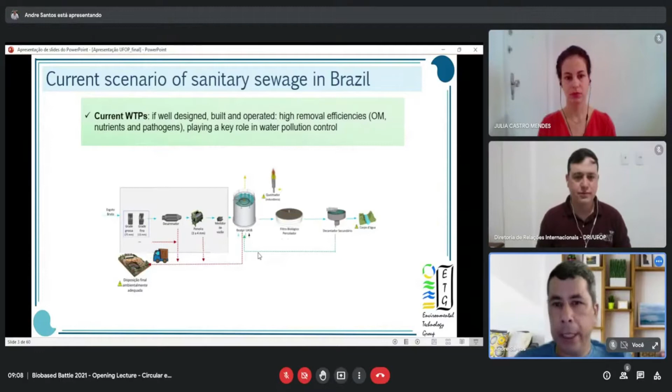Okay, so we have the current scenario of sanitary sewage in Brazil: our current wastewater treatment plants are designed based on environmental legislation. And if well designed, built and operated, we do have high removal efficiencies of organic matter, nutrients, and pathogens, playing a key role in water pollution control.

So there is the lack of perceived financial return with the wastewater treatment plant. We have to pay for the final disposal of the sludge, and sometimes that has a very high cost due to the volume that needs to be transported, and also the many kilometers from the source to the final disposal. The biogas is wasted, sometimes burned, when we apply some anaerobic digestion process to treat the wastewater.

And the treated liquid is disposed in a water course, often adding an unwanted residual of pollutants and contaminants. Unfortunately, in Brazil, we sometimes have the collection and the disposal of raw sewage. And sometimes when we do have a wastewater treatment plant, the efficiency is not very high. Sometimes it is limited to organic matter removal.

And sometimes we are causing environmental problems due to the discharge of nutrients, causing eutrophication, the death of fish, and changing the ecosystem that is based on the water. So in this scenario, the biogas is simply burned. Sometimes it is released to the atmosphere, and we know that methane is more problematic for the greenhouse effect than CO2, more than 25 times.

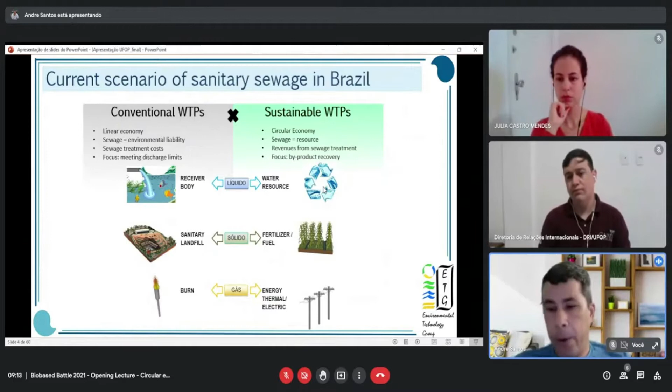And for the gas, and also for the solid, we may use it as a fuel, for instance applying anaerobic digestion or other technological processes, for instance pyrolysis, that can convert this solid into energy. And for the gas phase, instead of burning the methane, we could use it as thermal or electrical energy. So the main goal of this resource recovery is to contribute to the planetary limits.

Here we have many indicators of the planetary limits: ocean acidification, nitrogen cycle use, and many other topics. And here we have the green zone. We can see from this picture that many of these parameters are above the limit, for instance the nitrogen cycle. And phosphorus is very close to the limit. We have a problem with phosphorus because it is not a renewable source, and we don't have a technological way to produce phosphorus.

It's different, for instance, from nitrogen, where with the Haber-Bosch process we can convert the nitrogen in the gas to ammonia. So for phosphorus, we need to think of ways of returning this nutrient to food production. So these planetary limits point out that we need to recover resources from sewage treatment. This is a paper published in Nature in 2009.

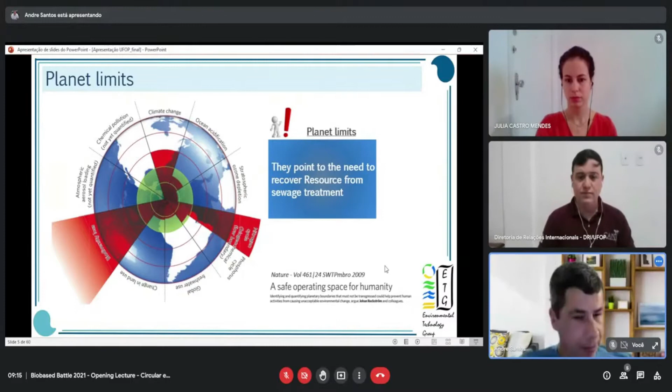And there is a very bad scenario that, for instance, in 100 to 150 years ahead, we have a phosphorus limitation for food production, and we have to accommodate population growth, and we have to give food to this population that is growing every year around the world.

So this kind of resource recovery is also in line with the Sustainable Development Goals, especially in the topics of clean water and sanitation, sustainable cities and communities, climate action, and also affordable and clean energy. So when we think about biogas reuse, we are reaching goal 7 of the SDGs.

So related to the sanitation conditions in Brazil, 43% of the sewage is collected and treated, and once more, this treatment sometimes is only to remove organic matter. Actually, few of the treatment plants in Brazil are designed and operated well to remove, for instance, nitrogen and phosphorus. 18% of the wastewater is collected and discharged untreated in the receiving body.

27% is not collected and treated. And we have around 12% of individual solutions. This is a new report published, here in the Atlas Esgotos, the Wastewater Atlas. It's a Brazilian publication. And we have a very different scenario in the Netherlands, in which the wastewater treatment coverage is almost 100% since 2008.

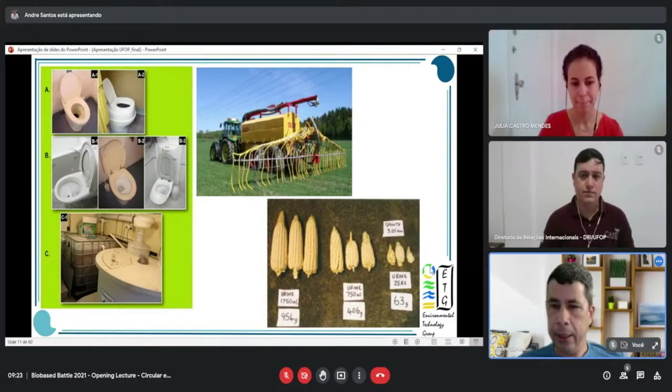This is only a slide showing the use of urine as a biofertilizer. With zero urine, this amount of urine, and this amount of urine, we see the subsequent increase of maize production in this slide. Urine, as I told you, is a very good biofertilizer.

Sometimes, after the treatment, which is simply to store the urine for about 30 to 60 days, the urine can return to the field for food production, replacing commercial fertilizers that sometimes are very expensive. So it's a very good way to produce bionutrients, the biofertilizers, locally and return them to produce food.

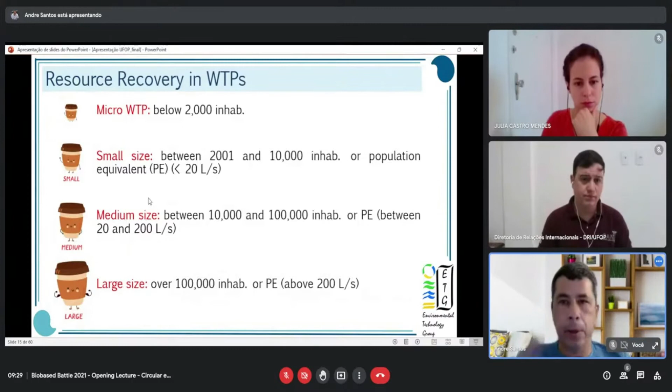For instance, when we think about biogas reuse for electricity generation, sometimes the equivalent population should be higher than this number. When we think about biogas reuse for heating purposes, the number should be around 10,000 to 100,000 inhabitants, and this flow is considered for this kind of purpose. So it's very important to keep track of the amount of people or the organic load involved, which of course results in higher or lower biogas production, for instance, in a treatment plant.

So when we think about sewage composition, 99.9% of the sewage is water, and 0.1% is solids. The organic matter present in the wastewater is a very rich source of chemical energy. So when we think about this organic matter and this energy, for instance in the wastewater produced in Brazil, this organic matter energy could supply around 42 gigawatt hours per month, which is equivalent to supplying this amount of households.

It's a very important way sometimes to decrease emissions and promote the reuse of this energy. When we think about the nutrients present in wastewater, for instance the macronutrients nitrogen, phosphorus and sulfur, the amount present could be equivalent to reusing these nutrients on about 48,000 hectares per year.

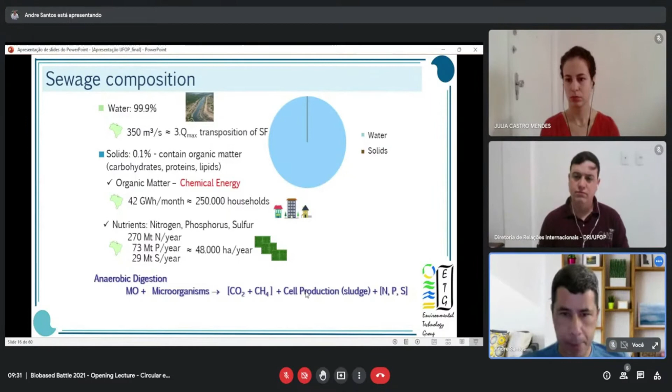When we think about different technological routes for wastewater treatment, we may compare, for instance, the activated sludge process, which is very common in the Netherlands and in Brazil, for instance in São Paulo and Rio, sometimes when we have a very dense population and lack of space. It's a very efficient process, but it consumes a lot of energy.

We have this consumption of 25 kilowatt-hours per inhabitant per year. If we apply, for instance, anaerobic treatment, the UASB reactor followed by a trickling filter, instead of consumption we have a production of about 15. So we decrease the consumption, which decreases operational costs, and sometimes we make the treatment plant self-sustainable in terms of energy, and sometimes we are able to sell what is not used to the electrical company.

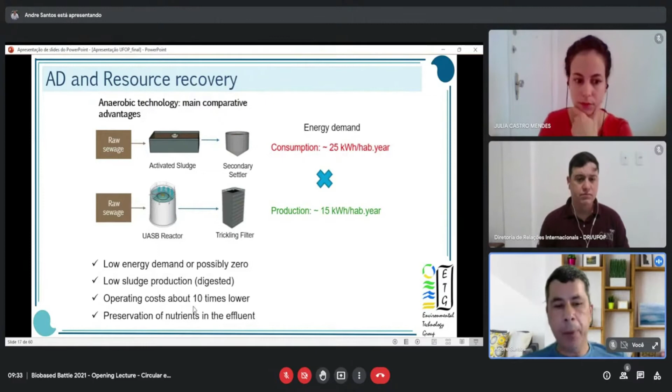If we compare these two technological treatment routes, the anaerobic digestion process has low energy demand, possibly zero. We have lower sludge production compared to the aerobic activated sludge process. We have operation costs about 10 times lower, and we have preservation of nutrients in the effluent, which is very important for reuse of these nutrients.

Over the years from 2015 to about 2020, there was development of the aerobic granular sludge, AGS, system in the Netherlands by Professor Mark van Loosdrecht and Merle de Kreuk from TU Delft, which decreased the aerobic treatment costs and also footprint.

The AGS process has as major advantages a 35% reduction in power consumption, 75% reduction in area demand or footprint, lower investment costs, operation and maintenance costs, and higher removal of simultaneous organic matter, nitrogen and phosphorus in a single reactor that works as a sequencing batch reactor, SBR process. There is also the possibility of resource recovery.

It's patented under the name Nereda, commercialized by the Royal Royal HaskoningDHV Dutch company. Here we have a picture of AGS biomass. If we cross this granule, we may see the different activities of heterotrophic bacteria, nitrogen removal bacteria, nitrification, denitrification, and phosphorus removal.

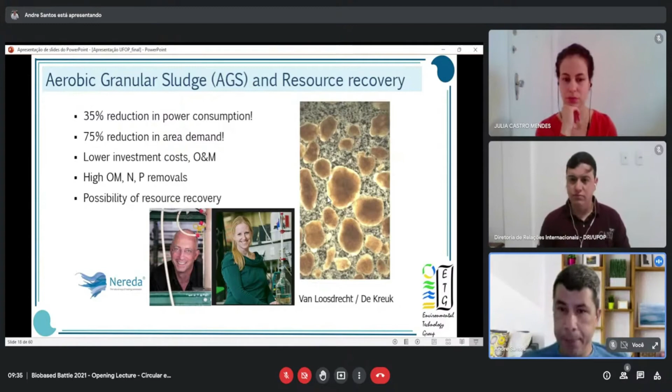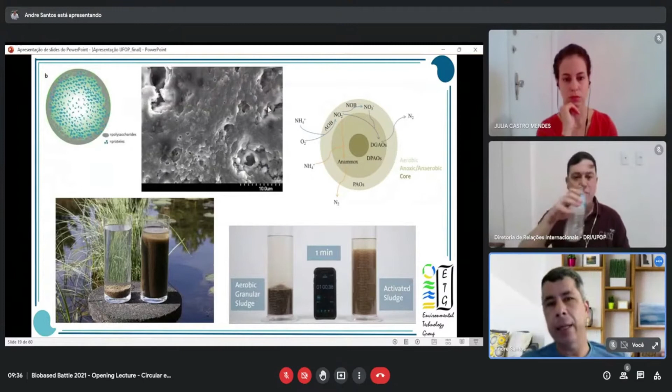My idea is not to go deeper into the microbiology here, but to give, as I told you, a big picture of the different possibilities. This nutrient removal and resource recovery is based on extracellular polymeric substance formation. We call EPS a kind of biological glue that is formed around the cytoplasm of the cell. Depending on the formation of the EPS, we have different possibilities of resource recovery.

Many bacteria can produce alginate-like exopolysaccharides in the EPS structure, and sometimes they form tryptophan-like amino acids. Here we have very good capacity for solids removal in wastewater treatment compared, for instance, with the activated sludge process.

The AGS biomass has higher EPS production and therefore a higher capacity for removing nutrients and other toxic pollutants present in the wastewater.

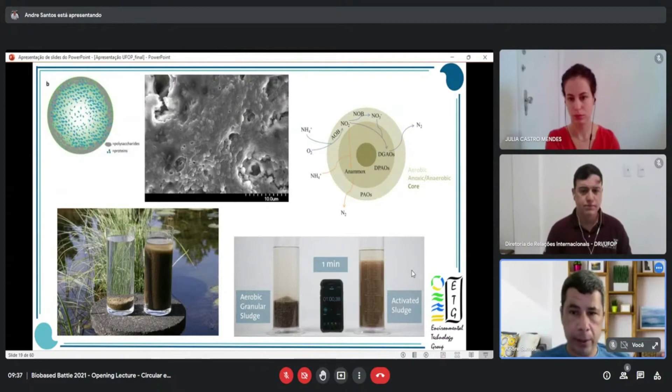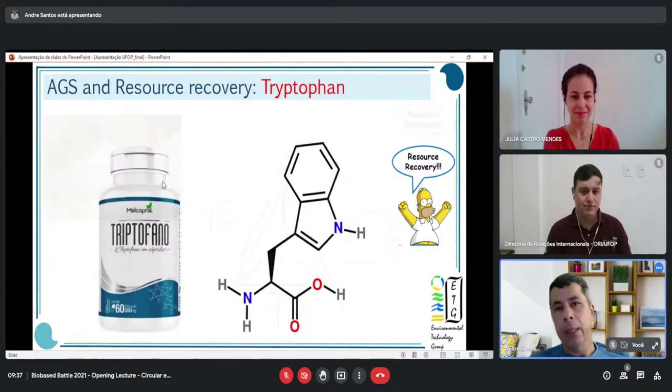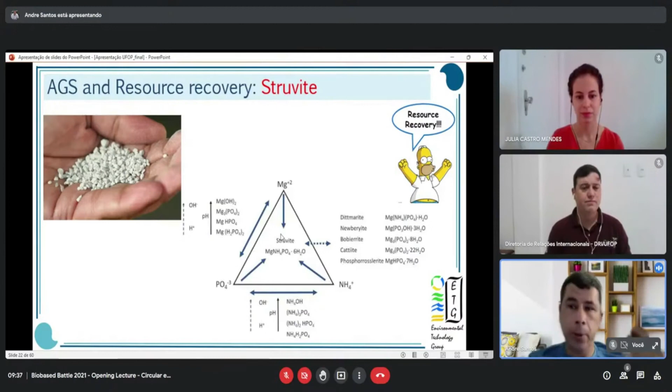For the different possibilities of water and resource recovery, we have alginate, we have tryptophan, and we have struvite, a kind of mineral present in wastewater that we recover during phosphorus removal and treatment in the treatment plant. We add magnesium in order to combine with the phosphate and ammonium present in the wastewater to form this compound, which is struvite. So there is a need to develop technology to remove the struvite from the treatment plant.

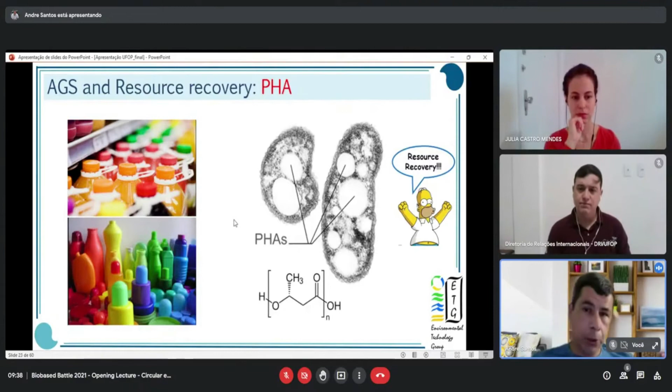We may also have the possibility of forming polyhydroxyalkanoate (PHA) in the treatment, which is formed inside the cell, different from alginate and tryptophan, which are formed in the EPS outside the cytoplasm. PHA is a kind of bioplastic that can be used in the petrochemical industry to replace petroleum-based chemicals. So, can we recover resources from agro-industrial wastewater treatment plants?

So this resource recovery can be done by applying the traditional AD process to form methane, converting the organic matter present in the wastewater to methane. Or we can think about different ways of resource recovery, for instance hydrogen, when we block methane production in the bioreactor and increase hydrogen production. Or we may think about converting the organic acids formed, the small organic acids like propionate, butyrate, acetate, through a chain elongation process to produce medium or high carboxylic acids, for instance caproic acid. That is sometimes the goal in many industrial processes already implemented at full scale.

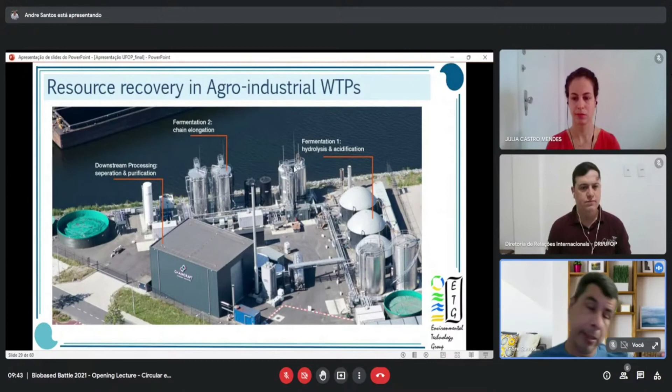We have fermentation step 1, related to hydrolysis and acidification. And we have another step related to the chain elongation process, to increase the number of carbons. So we have C2, acetate, or C3, propionate. We incorporate carbons to get a final carboxylic acid, for instance caproic acid or caprylic acid, depending on the number of carbons incorporated in the process. And of course, that will depend on the industrial use.

So other things to be recovered from wastewater could include energy, phosphate, sludge, bioplastics, proteins and biopolymers, fibers. For instance, in the Netherlands, they are recovering cellulose from wastewater because there is the habit of sending toilet paper into the toilet. It's different in Brazil, where we don't do this. Actually, our systems are not designed for it, and also the quality of our toilet paper is not good enough or produced to be sent through the toilet system. We can also recover metals, water, and many other things.

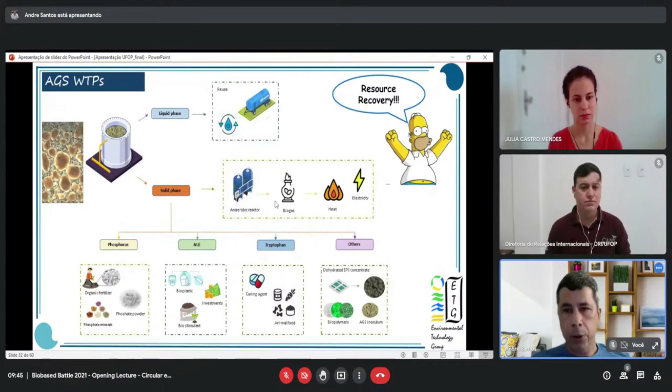So there are many possibilities, for instance for AGS, aerobic granular sludge, reuse in treatment plants. The liquid phase, the water to be reused. The solid phase, for instance phosphorus, alginate-like exopolymers, tryptophan, and other uses in the chemical and petrochemical industries. And for the solid phase, for instance, implementing the anaerobic process or other thermal conversion processes to recover this sludge as energy.

So this approach is already implemented in the Netherlands, for instance, in these two treatment plants in Zutphen and also in Epe in the Netherlands, that are using the AGS system and recovering the alginate-like or other biopolymers produced by the wastewater treatment and the sludge collection and reuse of this sludge. This bioproduct is called Kaumera. So it is implemented by the Nereda treatment plants.

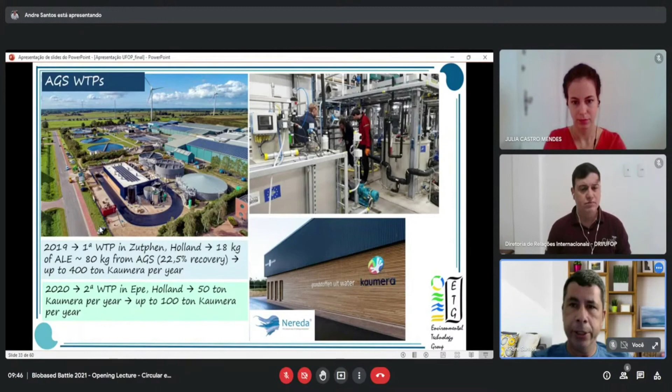So there is a goal to recover many tons of Kaumera per year and sell this product to the industry. So it's very important to have this chain of product generation, recovery, and a very good customer to sell the product. And the Netherlands is applying this kind of energy and resource factories in many different treatment plants to reuse the wastewater as a heat recovery process, or sometimes nutrient recovery process.

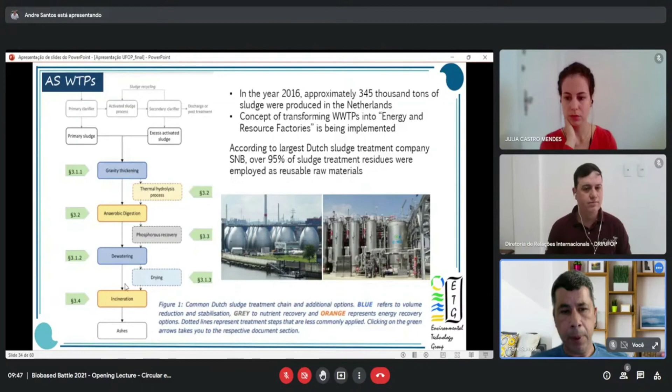For instance, using this activated sludge system, this heat can be recovered by using the anaerobic digestion process, or sometimes using the incineration process. So the Netherlands is recovering 80 to 90% of the phosphate in the form of struvite, and this kind of recovery is very good, because with struvite, the release of this nutrient in the field is lower than the commercial fertilizer. It is very good for the crops.

This is low release, and the solid waste generated in the treatment plant, the sludge, sometimes after the AD process, is incinerated, only the sludge, or sometimes the sludge together with the solid waste generated in the country. And sometimes the ashes are converted and sold to Germany to use in the mines.

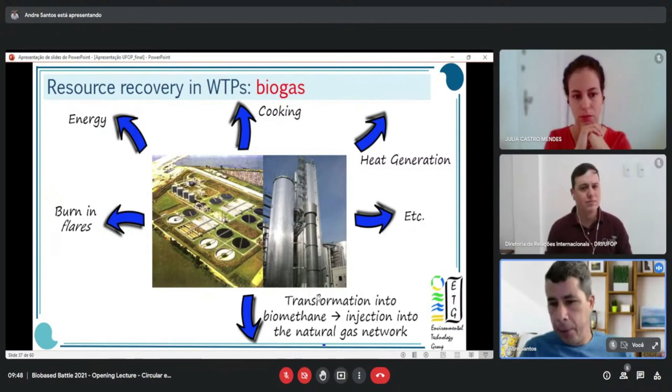Okay, so the possibilities we have: the water, the biogas as energy, cooking, heat generation, transformation to biomethane, burning flares, and when the biogas is transformed to biomethane, we have the injection in the natural gas network. We may have the possibility of the use of microalgae to produce biofuels, animal nutrition, human nutrition, to be converted into cosmetics, drugs, fertilizers. So many opportunities.

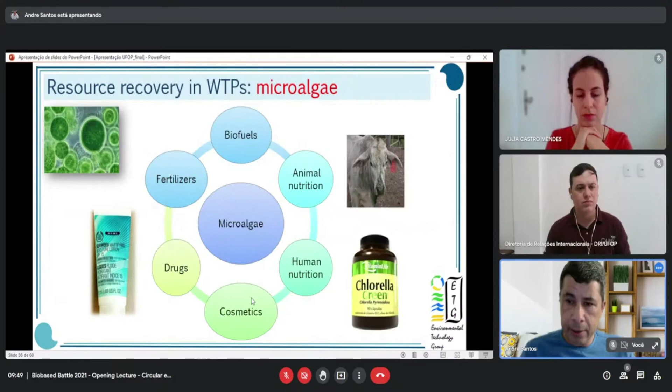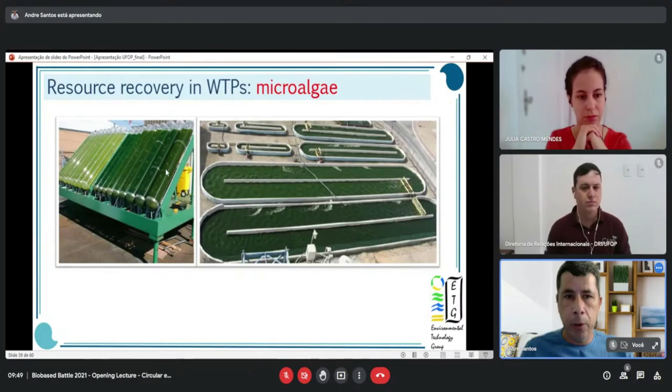And we have the possibility of using open ponds like this one, or photobioreactors. And we have the challenge of microalgae separation and reuse of this microalgae. And the sludge can be used in the soil, as I told you. So in 2007, 40% of the sludge produced in the EU was applied in agriculture, with large differences between individual countries. And in Brazil, only a little sludge is being recovered. For instance, Paraná has some experience on this reuse of sludge, but very low use of sludge in Brazil.

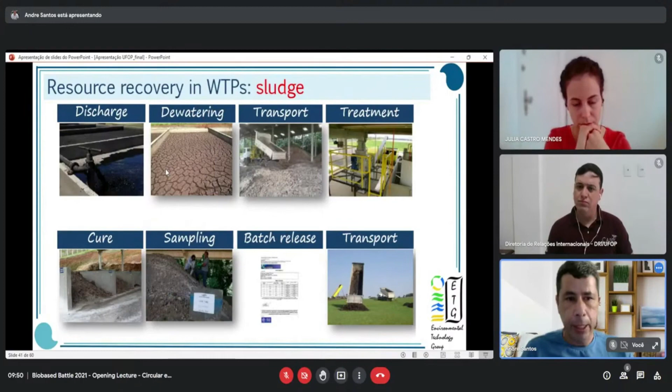We hope that now, after our legislation was changed last year, we have more experience of sludge reuse for soil conditioning and improving the properties. And finally, we have the possibility of resource recovery in micro wastewater treatment plants. So we may combine the housing deficit with a project in order to increase the resource recovery in small treatment plants. So, for instance, if we think about a building, the best resource that can be recovered is the water, because we don't have the need for nitrogen and phosphate and energy, because the production is very low.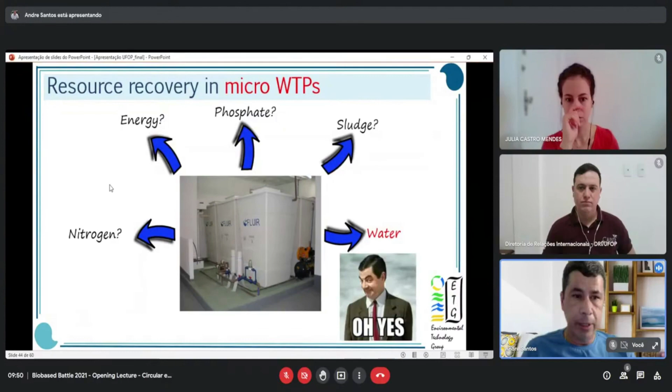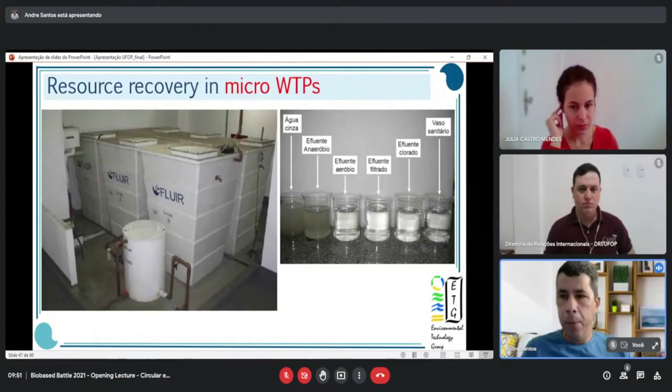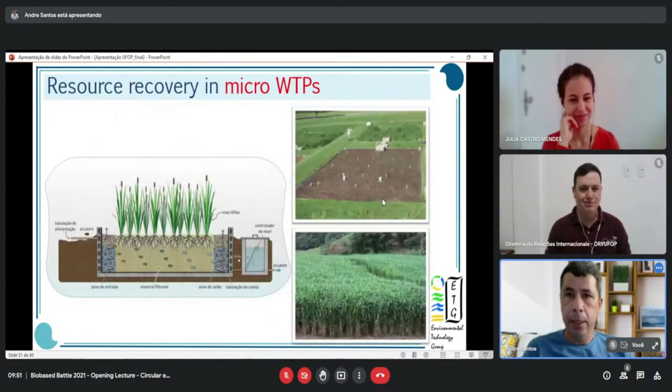But if we think about a different approach, for instance, here we use the gray water, transforming the gray water into almost purified water to be used in the toilet in a small wastewater treatment plant. We need to perform some cost analysis to see the real possibility and the payback of the investment. But if we apply the treatment plant in a scenario like this, we may have the possibility of using a higher amount of nitrogen, phosphate, sludge, and water. So in this way, we increase the possibilities of resource recovery in wastewater treatment plants.